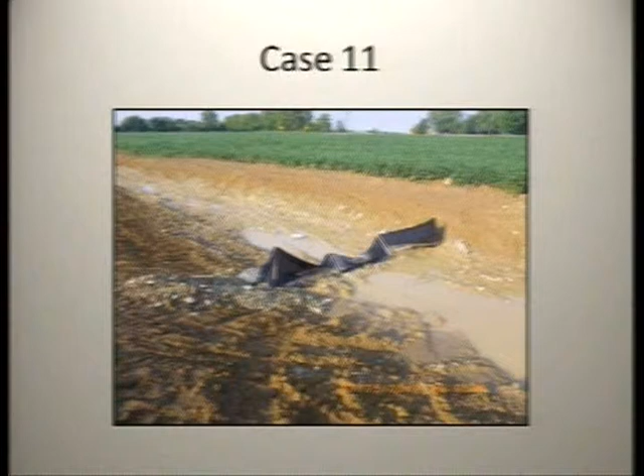But it's not the right application of silt fence to be in concentrated flow.

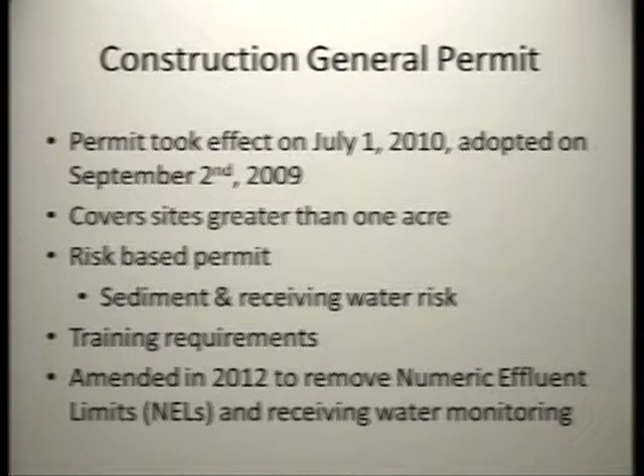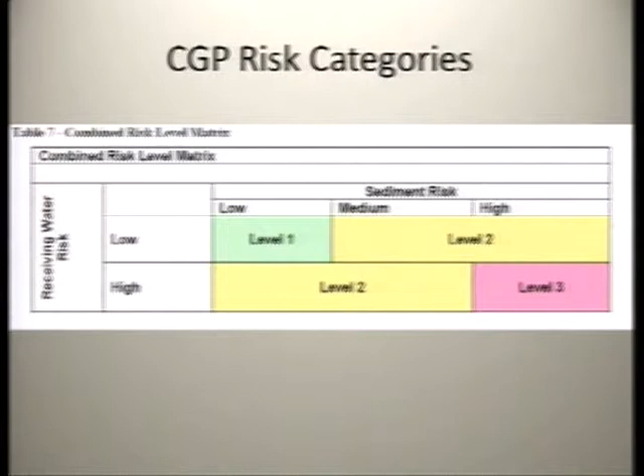So as far as the risk categories, there are 3 categories, levels 1, 2, and 3, escalating in order, and they are based on a combination of your sediment risk and your receiving water risk. All risks are determined via Appendix 1 of the permit, and the risk level 1 requirements are in Attachment C.

There are no numeric action levels for risk level 1, and basically what you're looking at are primarily housekeeping BMPs for risk level 1 — everything from stockpile materials, chemical storage, covered waste containers. Most of the information that Scott went through is required as part of risk level 1 for these sites.

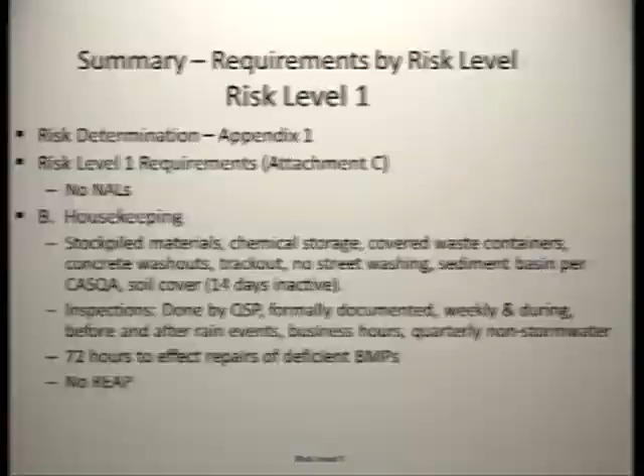Now, as far as inspections, they have to be done by a qualified SWPPP practitioner. They have to be documented, and they're to take place on a weekly basis, and also before and after rain events. They're to take place during business hours, and there's also a quarterly non-stormwater inspection.

And then if there are deficient BMPs identified through inspections of the site, those fixes have to be in place within 72 hours. And again, there's no rain event action plan for the risk level 1 sites.

For risk level 2 and 3 requirements, you do have the numeric action levels — pH and turbidity. There is the requirement of the rain event action plans for all phases of construction, and they have to be developed 48 hours prior to a rain event and implemented on site 24 hours prior to the event.

There are other requirements like soil cover for inactive areas, and sediment controls at the top, toe, and face of slopes. There's the requirement to limit traffic to all designated entrances and exits — this is really a good rule of thumb for any construction site. And then they're also required to inspect access roads for daily track-out.

There is sampling associated with the risk level 2 and 3 sites, and when it is raining, you're sampling 3 times a day for pH and turbidity, trying to characterize the worst discharges from your site — characterizing all disturbed areas. There's no requirement to sample if it is dangerous or outside of business hours. You're also sampling any non-stormwater discharges that leave the site.

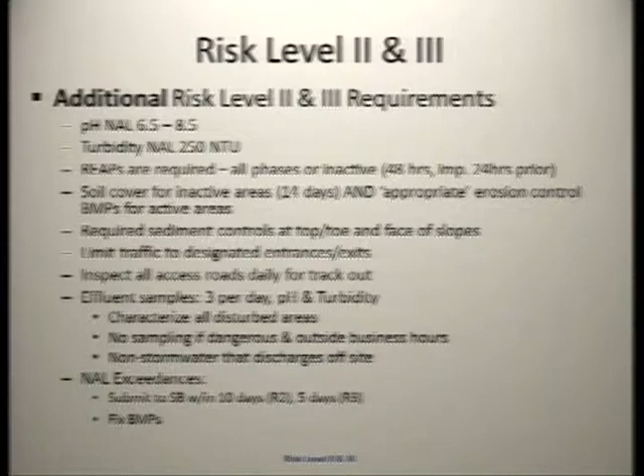If there is an exceedance of the NALs, then you submit to the state board within 10 days for risk level 2 and within 5 days for risk level 3 sites. You also have to identify what the fixes are to the BMPs to make sure you're not triggering the NALs any further.

So some other information on the CGP — there is the QSD, QSP training, provided by authorized trainers of record through CASQA. For the qualified SWPPP developers, it's 24 hours of training, and for qualified SWPPP practitioners, there's 16 hours of training. The county has offered this in the past, and the plan is to offer another course early next year. More information can be found at the State Water Resources Control Board website on the CGP.

Then I'm going to talk a little bit about the specific requirements of the MS4 permit, the Santa Ana region permit. For municipal inspection of construction sites, there's a variety of different requirements. The first is that construction activities within a municipality have to be consistent with the model construction program. The city also has to maintain an updated inventory of all construction sites within its jurisdiction, for those sites that have building and grading permits.

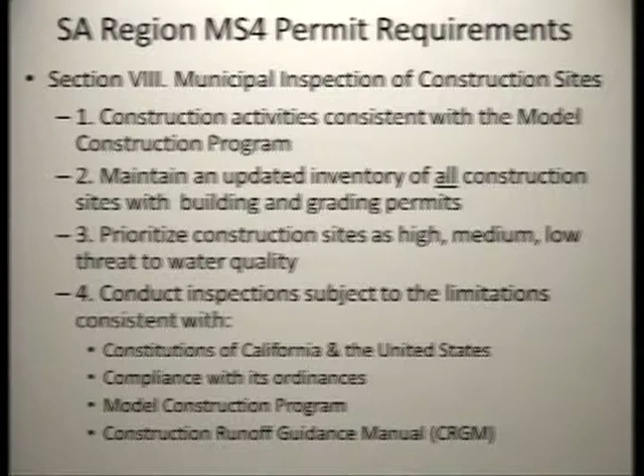There's a requirement to prioritize construction sites as high, medium, and low threat to water quality. When conducting inspections, you are limited to consistency with the California and United States Constitution, compliance with your erosion and sediment control ordinances, the Model Construction Program in Orange County, and the Orange County Construction Runoff Guidance Manual. So those are your guides.

As far as the checklist for inspections goes, you have to verify if a site is greater than 1 acre, that they have coverage under the Construction General Permit, that they have an erosion and sediment control plan, and that you've reviewed it and documented that you've reviewed it.

You're also observing for non-stormwater discharges and any potential pollutant sources on a construction site. You want to make sure the site is in compliance with any ordinances you have, the MS4 permit, WQMPs, and the construction runoff guidance manual. And you're also looking and assessing all the different BMPs on site to see if they are actually implemented correctly.

As far as frequencies of inspection go, during the dry season your frequency is sufficient to control sediment and other pollutants and non-stormwater, so that is determined on your own basis. During the wet season, based on those priorities that were set, your high priority sites you're inspecting once per month, your medium priority sites twice per wet season, and your low priority sites once per the wet season.

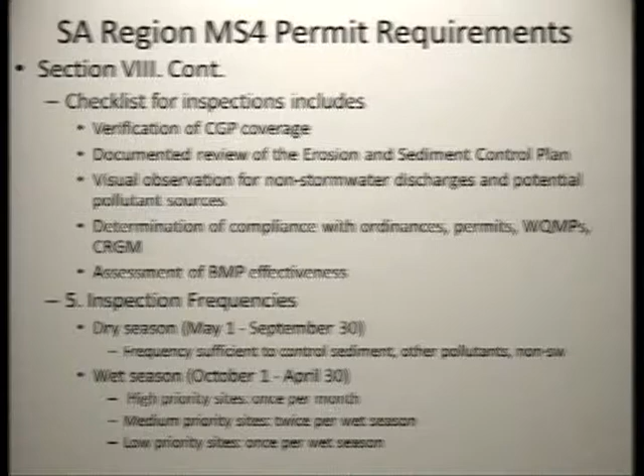There also has to be consistent enforcement for non-compliant sites, and that enforcement includes enforcement based on the permit and your ordinances. There's a requirement to modify the local implementation plans to identify the enforcement linkage with the regional board.

When do you get the regional board involved on those most recalcitrant sites? Your sanctions also have to include a written enforcement order at the time of inspection, and then any other appropriate actions in making sure that they comply.

There are also requirements to notify the regional board. You're going to notify within 24 hours if there is an imminent threat to human health or the environment, and then for any other situations, you're going to notify within 5 days.

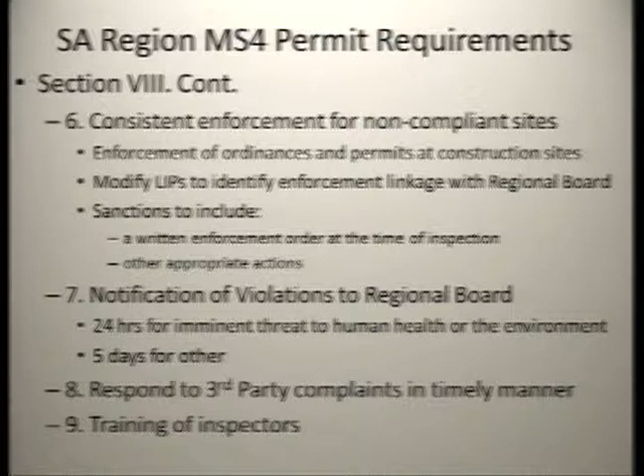You also have to be able to respond to third-party complaints. If you get a citizen calling you up and saying there's a discharge of sediment or sediment-laden water from a construction site, you have to respond within a timely manner. And then there's also training for inspectors, and that's part of what we're doing here today.

Jennifer mentioned the Construction Runoff Guidance Manual. The idea with this manual was to provide useful and succinct information for contractors to essentially control pollutant discharges from construction sites. The document incorporates all the different water quality requirements for both the San Diego and Santa Ana regions, and it incorporates all the different BMPs we talked about here. It's consistent with CASQA's construction runoff manual, and it's available at ocwatersheds.com.

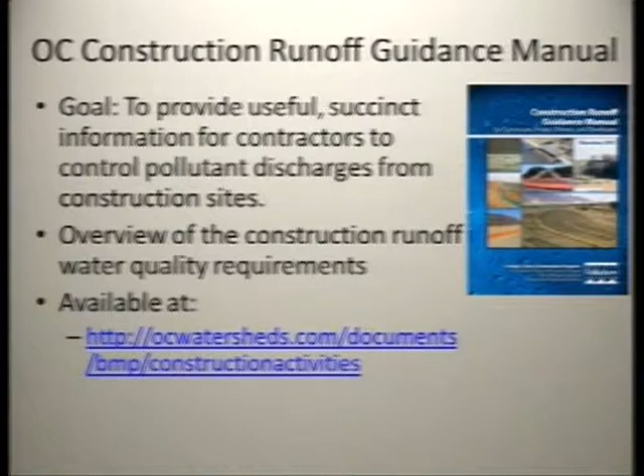So now I'm going to go through the small sites and then do a similar interactive exercise. A couple years ago we heard from all of you that this is the majority of sites that you're going out to inspect. It's not the big, large acre sites, but really the smaller, urban, single-family construction sites.

So what we did is we focused this part of the presentation on some of the things that you should be looking for on those smaller sites. And we added a bunch of new information this year so that you could get a better idea of what you should be doing and looking for on the smaller sites.

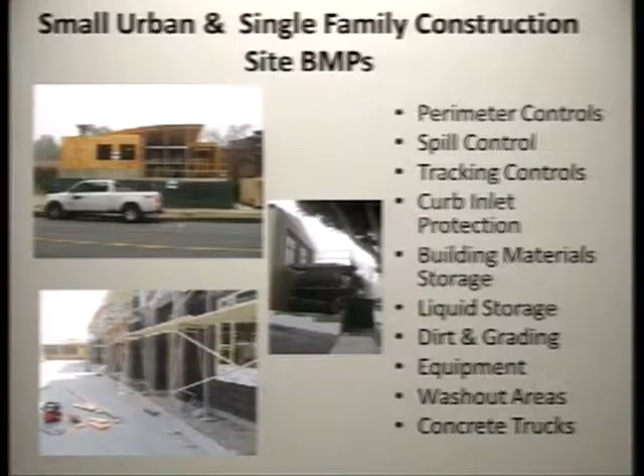So these are all the different elements. I'm going to go through them all in detail. The first thing is perimeter controls. On the smaller sites, you want to make sure that you either have gravel bag silt fences or straw wattles, making sure the site is clearly delineated, especially critical in ultra-urban and single-family residential situations. It's important to understand where those limits are. It also helps by putting these barriers up to make sure any vehicles going in and out of the construction site are using the proper entrances and exits, and you're not running over the perimeter controls as well.

The other part of this is spill controls. This should be one of the first things that you look at on a construction site.

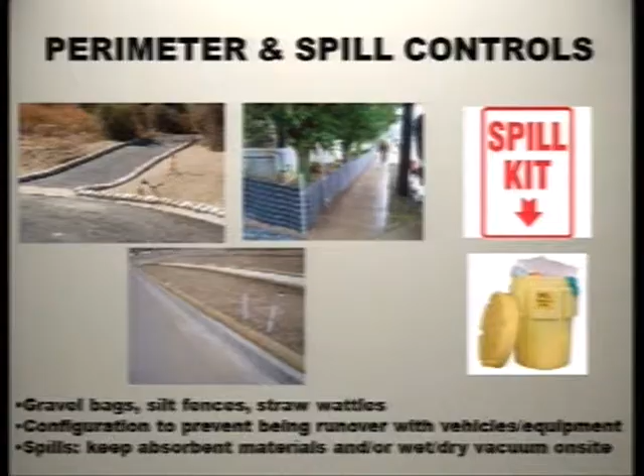Ask, where's your spill control kit? This is a requirement; they need to have this on site. Spill kits can be cheap or expensive, but all the stuff in them is easily obtainable. Even on smaller sites, you can have significant discharges of different types of liquids. So construction sites need to make sure they have these materials on site. In addition, I'd recommend a wet dry vacuum and other absorbent materials.

All the entrances should really be cleaned up on a daily basis, and you should encourage the construction sites you're inspecting to do this, making sure anything is cleaned up every day.

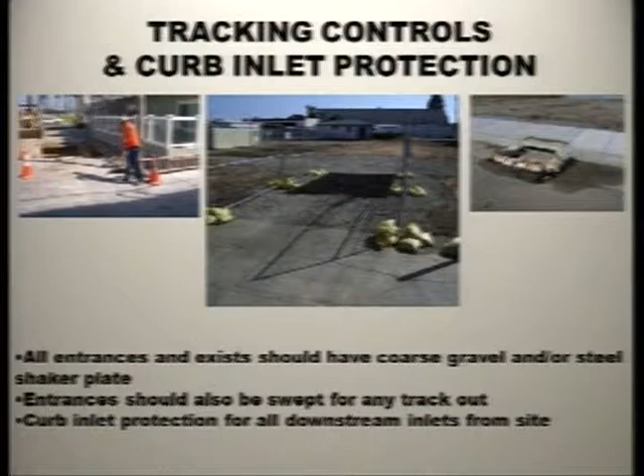Curb inlet protection is a little different on smaller sites. For the vast majority of smaller sites, you're not going to have inlets on the site itself, but they'll be in the street, down the street from the construction site. It could be out of sight from the construction site—that doesn't mean they don't need to protect that inlet. So make sure you're inspecting that those downstream inlets are protected, and if they're not, coordinate with the construction site to make sure they're putting in the proper controls.

For materials and liquid storage, the idea is you need to have all materials and liquids covered and in stored containers if possible. The best case scenario we've seen for small single family construction sites is that as they're constructing the downstairs, they're storing the materials within the house itself. In an ultra urban situation, if that's not possible, a shipping container is really good for storing materials. It's also lockable, so you can prevent any theft of materials on site.

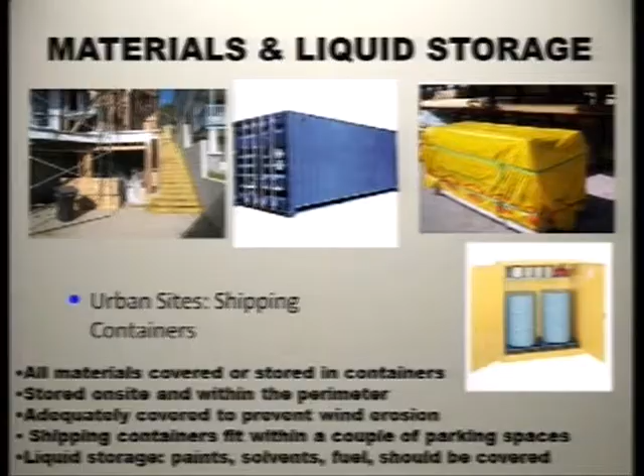For other materials, you want to make sure they've covered them to prevent wind erosion, and that they're up on pallets so there's no potential for stormwater to come in contact with them. For liquid storage—how many construction sites do we see with paint buckets and different types of liquids just sitting around? All these things really need to be kept in a specified container designed for this. The picture on the right is designed as a self-contained unit—it's lockable and has secondary containment integrated into it. It's not that expensive, so those types of systems are out there and should be used on construction sites.

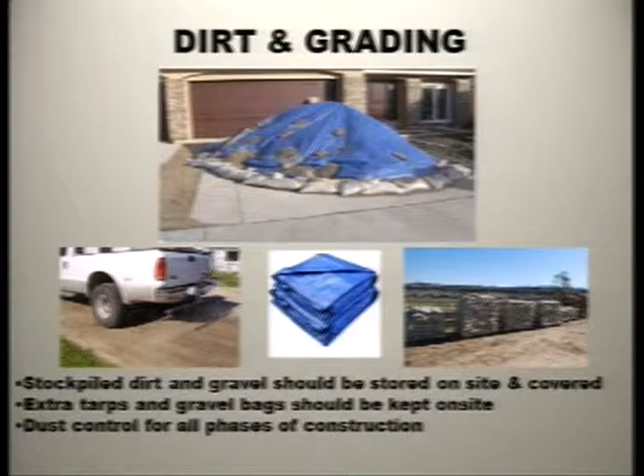As far as dirt and grading goes, there's going to be stockpiles at every construction site—it's just a matter of how often they're used. If they're not being used, they need to be covered and stored on site, and should be covered after activities during the day anyway. The best case scenario is to put those stockpiles inside your perimeter controls. The picture here isn't inside the perimeter controls, but it does have a tarp on it and a sandbag barrier around it. Since there are consistently stockpiles of materials at construction sites, encourage them to keep extra tarps and extra gravel bags on site so that if they get more stockpiles, they can immediately apply the right controls.

Even for the smaller sites, dust control is a requirement. This can be as simple as having a construction worker spray water when needed, making sure there are no non-stormwater discharges. There are even systems that can be attached to the back of a pickup truck for dust control.

As far as equipment goes, storage of the equipment is the same principle. You should try to encourage them to store their equipment within their perimeter controls. That's not always feasible, especially in ultra-urban construction sites, but at a minimum, they should have drip pans associated with them.

There are even really small drip pans for ultra small equipment that have little berms in them, and they're really good to implement on smaller construction sites.

As far as dumpsters go, all dumpsters should be covered. That should just be standard operating procedure. We don't always see it, but all dumpster companies now have covers available. For the smaller sites, you want to use the smaller dumpsters.

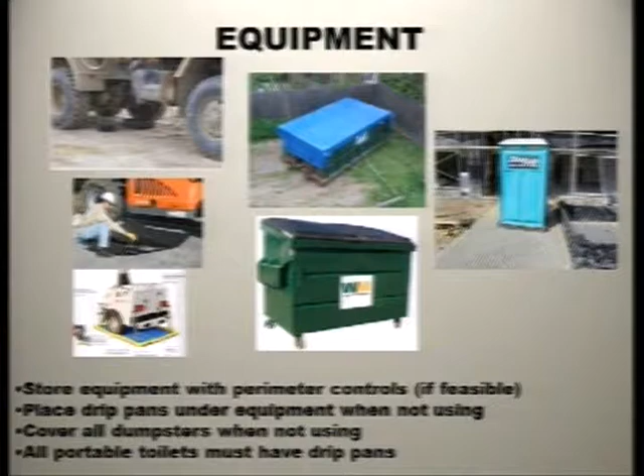And then, of course, on the portable toilets, I think pretty much all portable toilets now come with secondary containment, the trays underneath them. Make sure those toilets do have that, and whatever facility they're using to rent them should be able to provide those trays.

Okay, washout areas. This is for the disposal of wet construction materials. The idea with these washout areas is that they have to be watertight. There's everything from really high-end materials down to even a kiddie pool that can work in certain situations.

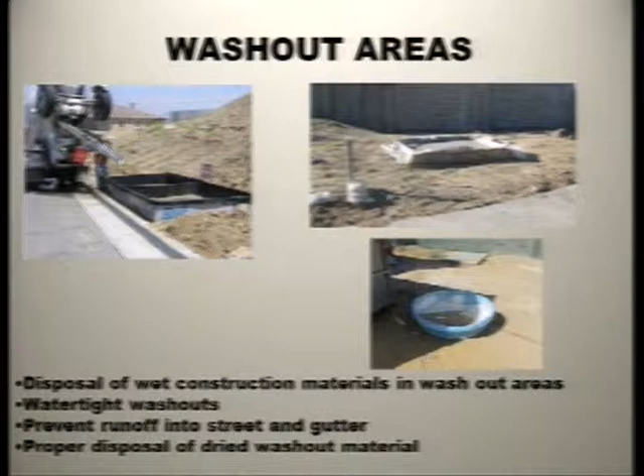In this example, they should really have a tarp under it, but it does work. There are a lot of different products out there. We even saw a product yesterday in the training that was essentially a plastic bag in a cardboard box, and it works. So there are a lot of cheap opportunities or materials out there that can work.

You want to make sure that when they're cleaning the concrete waste and wet construction materials, they're not getting any residue into the street or gutter, and if they do, make sure that's cleaned up in an appropriate manner.

Also make sure there is proper disposal of the dried washout material. That should be placed in the appropriate waste receptacles.

As far as the concrete trucks and pumpers, most of the time these are operating outside of the perimeter controls, so they need to have perimeter controls themselves. They need tarps placed underneath them during operation.

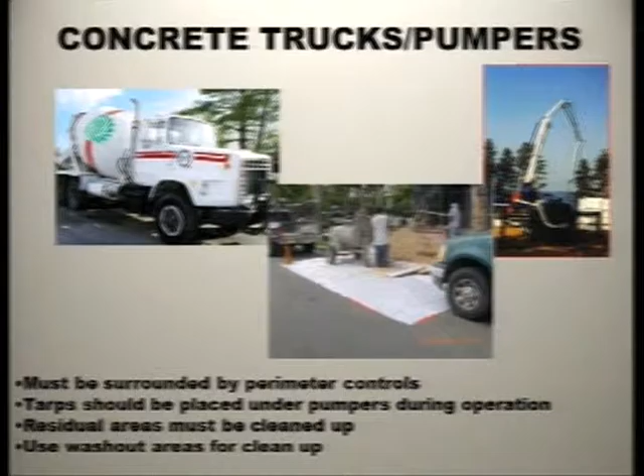Any residual that comes about has to be cleaned up. This goes from the large pumping trucks to normal concrete trucks to even the small concrete mixers. Everything should be done on top of a tarp, and then obviously using the washout areas for proper cleanup.

This is an example of an individual lot erosion control plan, and it really exemplifies what can be done in a proper layout of an erosion control plan on site. You can see the perimeter controls, and you can see the prevention of run-on from an adjacent site.

You see the stockpiled materials, the proper track out and entrance controls, and so forth. It really shows that even on small sites, all of these things can be done, and you can still have an active and functioning construction site.

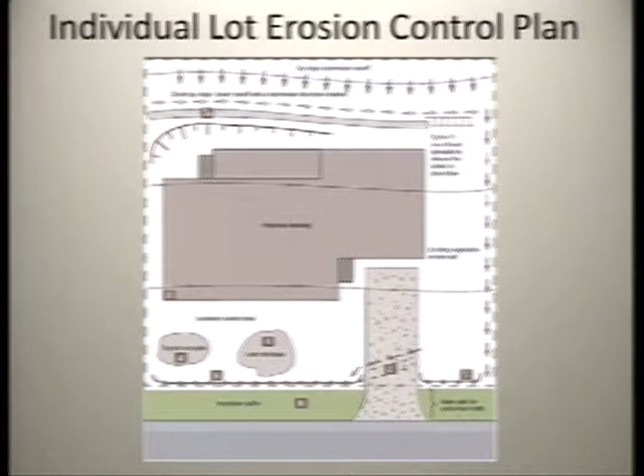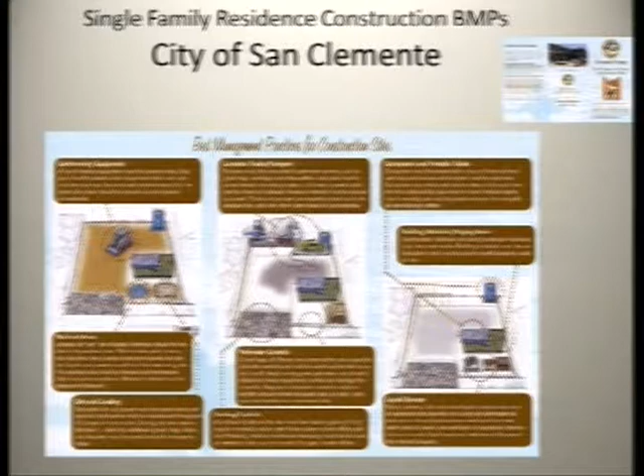This is a trifold handout provided by the City of San Clemente that essentially incorporates everything I just discussed, but in an easy pamphlet that can be handed out to contractors so they understand the basic things they need to know.

It's in cartoon format, and it really just provides a reminder to people of what they should be doing. I know other cities use this to hand out to people, and it's a good idea to think about developing something similar for your own city.

So now I'm going to go through the small sites interactive assessment, and I'm going to ask you to identify what some of the issues are with small site case number one. Just shout it out and I'll repeat it in the microphone.

So what do you guys think? What's wrong here? Perimeter, right, no perimeter controls. What else?

That's right, so there's really no defined entrance. It's kind of hard to see. They have the porta potty inside the garage, which is good, and it looks like it has secondary containment. But there's a stockpile that's being tracked out. There's also gravel bags, but it's kind of hard to see. There's some cement bags that are spilling out into the gutter. So that's a big no-no.

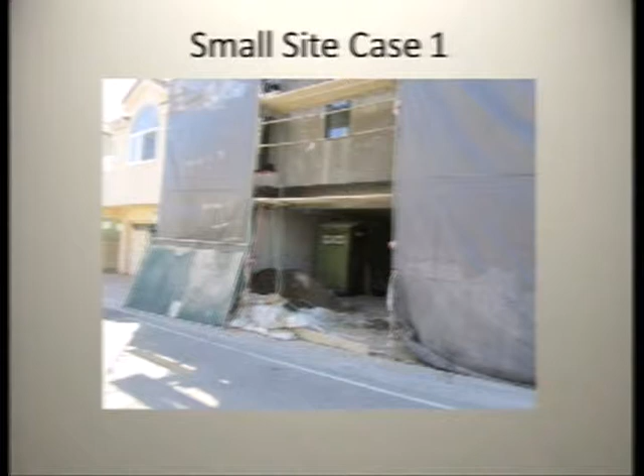Okay, this is my new favorite photo. I just took this a couple weeks ago. It's out on a construction site, and there's a lot of wrong things going on here. I'd say there's probably at least four issues, and then kind of a big overarching issue. So what do you guys think? What's wrong here?

Perimeter, no tarp, trash, right? Stockpile. That's right, porta potties by the street. So the most interesting thing that I found here is that there's some cement residue right on what looks like - yep, those are pervious pavers. Well, guess what? They're not pervious anymore. So this is an example of a developer that spent a lot of money incorporating a post-construction control that has essentially been nullified by poor construction practices.

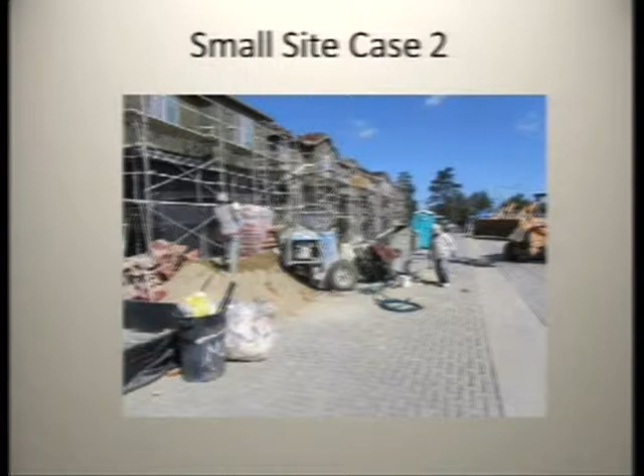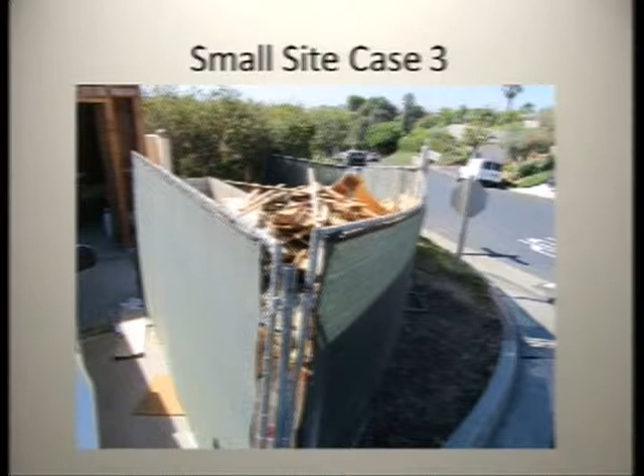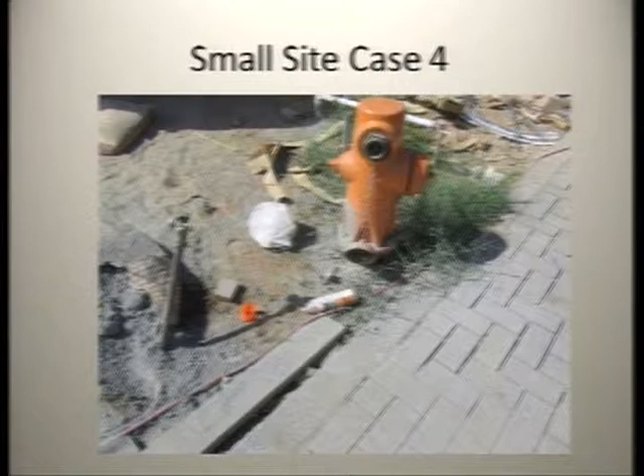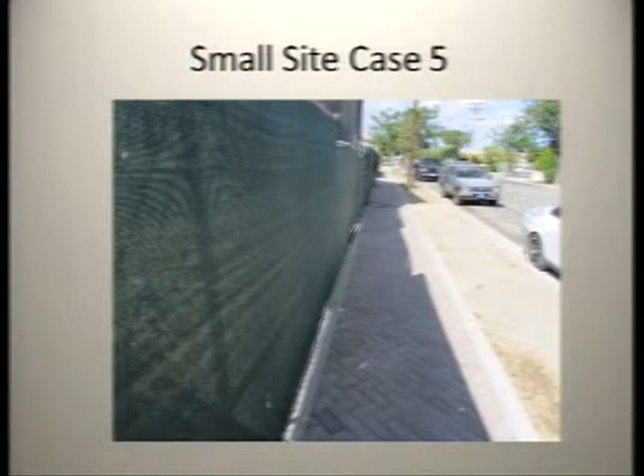This looks pretty good, right? What's wrong here? That's right - a green fence is not a perimeter control. We all know that. There's no controls here whatsoever. And if you look way down at the back there, there's a discharge - a discharge of sediment or cement-laden water with some stucco operations as well.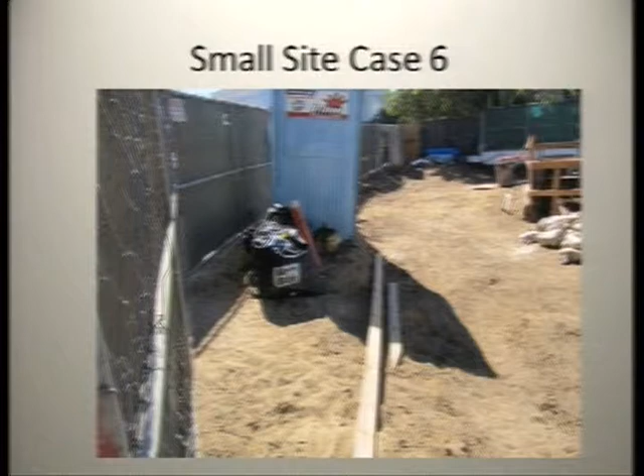This one's a little harder to see, but can you see the shadow on the other side of the green fence? What's there? Stockpile. An uncontrolled stockpile that, when it rains, that material is going right into what? An unprotected catch basin.

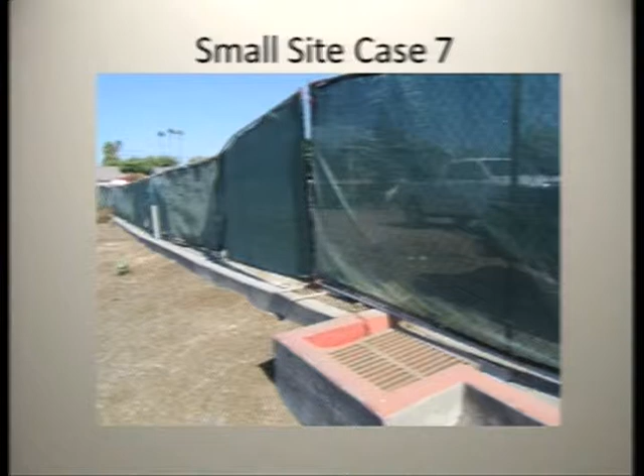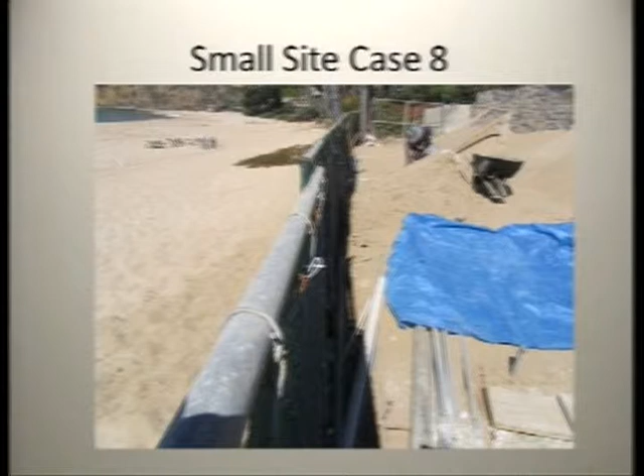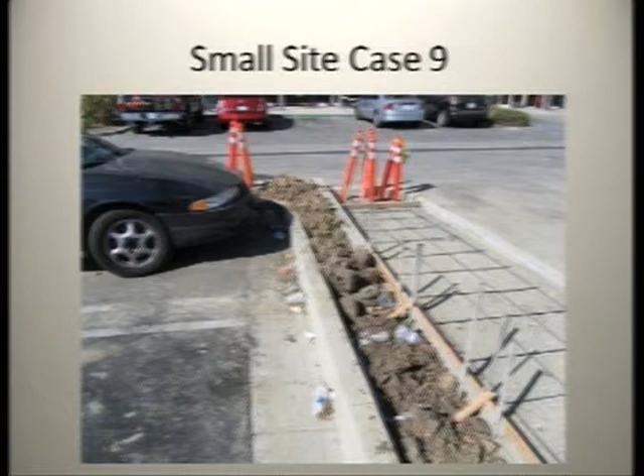Okay, what would you do differently on this particular site? Just a simple, easy fix here that would change the whole dynamic here. Sweep it up is a good option, but I would also have a perimeter around this, right? People are walking through this, tracking sediment all over the place. There's trash. This is an active parking lot, but this part of the parking lot shouldn't be active during construction.

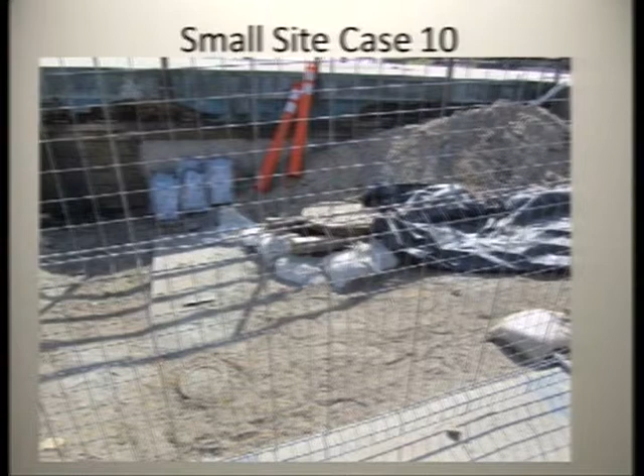What's right next to the catch basin? Stockpile, right. And then you see those bags over on the left? What do you think those are? Cement bags that are leaking out right next to the catch basin. And then in the front, what do we have? No perimeter controls. So again, this is a bad actor.

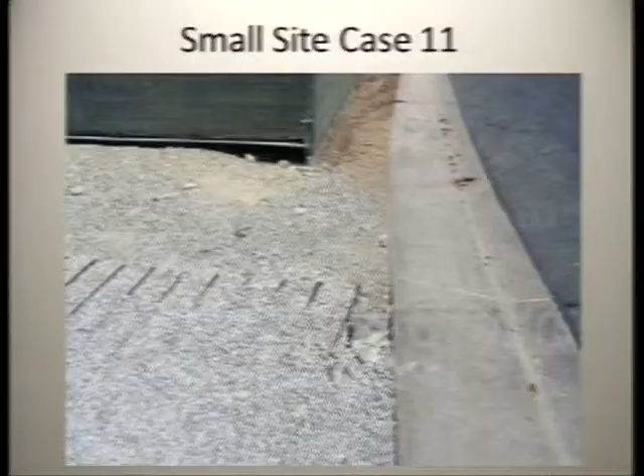Yeah, that's a really good suggestion. And actually, in previous years, we did kind of a good and bad comparison. But yeah, that's a great idea for sure.

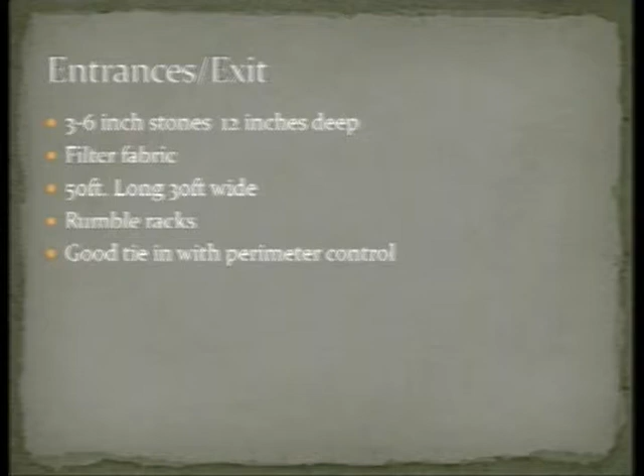I'm going to talk a little bit about entrances and exits. Some of the basics: 3-to-6-inch stone, 12 inches deep, over filter fabric, 50 feet long, 30 feet wide, rumble racks. A good tie-in to perimeter control. We've already seen that in slides where there's no tie-in, there's just a big opening on either side of it for whatever reason. So that's something that as you're going to the job site and making your visits for other inspections, letting them know, hey, you need to get that tuned up, tighten it up so we don't have a problem with an event causing discharge into the street and them not complying.

Some additional items, and these aren't maybe required for pollution prevention, but they'll definitely help. Gates, you're going to see gates at the entrances, so people going into the job site after a rain event and doing rodeos with their trucks and then driving out, and you've got track-out all over the place, with locks on the gates also helps. Illumination at that gate with site contact info is key too. If something's going on the job site and someone sees a problem, they can't contact anybody to let them know what's going on otherwise. These are some items, like I said, that may not be a requirement but are definitely helpful. These are included in our pre-con.